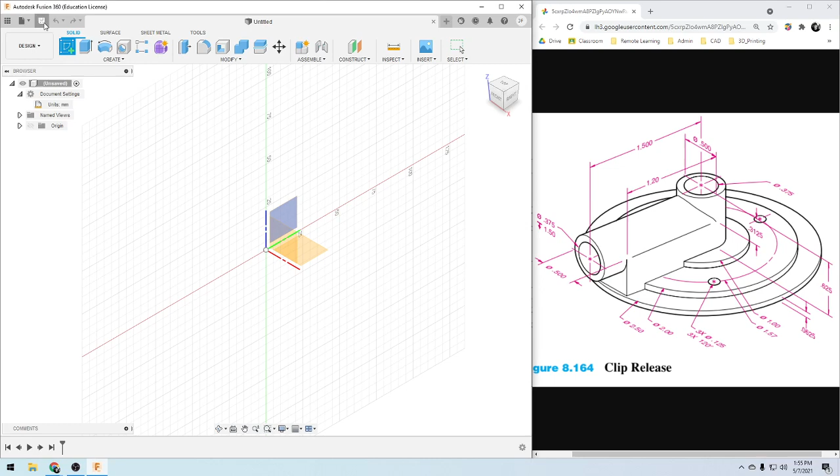First things first, I gotta make sure I'm in the right dimensions, which I'm not, and I want to save, make sure this is saved. So clip release, and my units are going to be in inches, and now I can start.

So create a sketch. I'm going to work from the top plane, and I'm just going to start creating some circles here, some discs. The first one is 2.5 inches. Dimension that. 2.5.

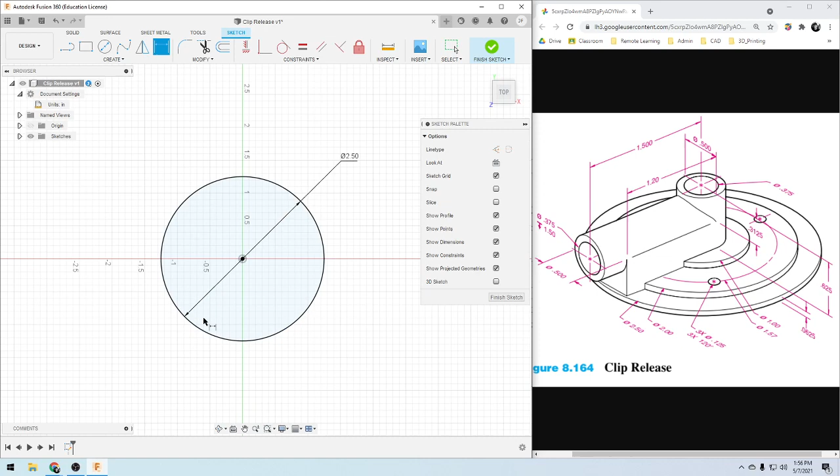And then extrude it, E for extrude. The depth, or the thickness, is 0.0625. So it's a relatively small part here.

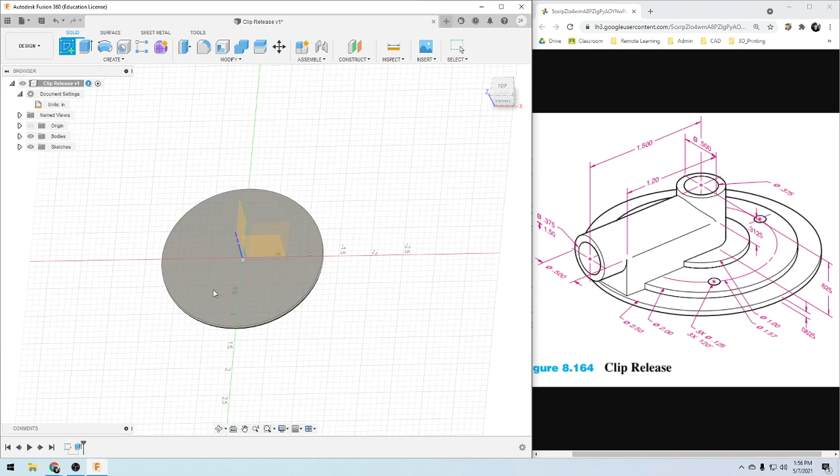From here, I'm going to extrude another disc, and I'm going to choose the top there, circle. This one is 2 inches, and I can extrude it.

I am going to extrude this. Since we're not given more information on the depth of this, we're just going to assume it is 0.0625, because normally if it wasn't, they would let us know. They would give these individually, because there's symmetry going on here, and to break that without telling us would just be poor on their part. So we're going to make that assumption, 0.0625.

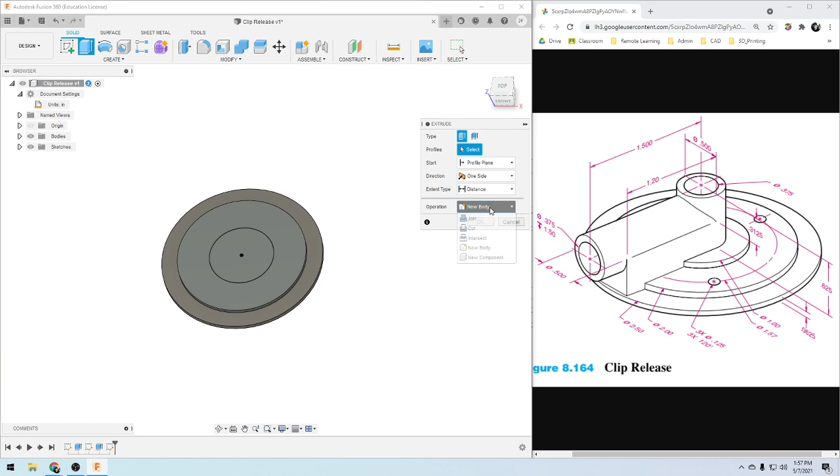Click in here. I mean, we could also do the math, right? We could figure out the space in between, but that's not necessary. Another circle, and this is going to be 1 inch. E for extrude, join, I'm not creating a new body here. And again, 0.0625.

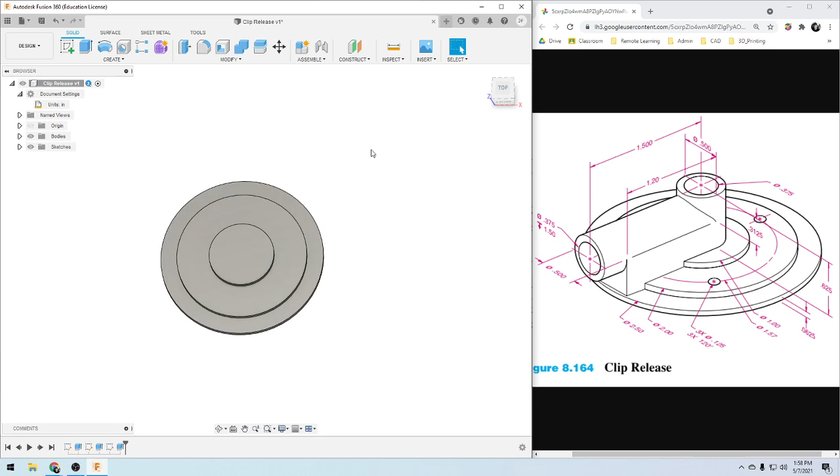So we look good, we look good. Alright, so now I'm going to get these holes out of the way. That's going to be a pattern too that I'm going to use.

I'm on the second step there, so create a sketch, click the second step, and then I'm going to create a circle, but I want a construction circle. So I'm going to click there, click here, dimension that out, and that is 1.57.

Now I'm going to create a circle that is here. Oh, I do not want a construction circle. This one is going to be my hole.

And I am making the assumption here that this is directly in line with the quadrant of the middle hole, the top quadrant. So I'm making the assumption that it's directly above here, because again, I don't have any other assumptions I can make.

And this dimension is going to be 0.125. And if it's not black, sometimes we can create a construction line that will kind of snap things into place and define it. So now it knows where it's lined up with this vertical line.

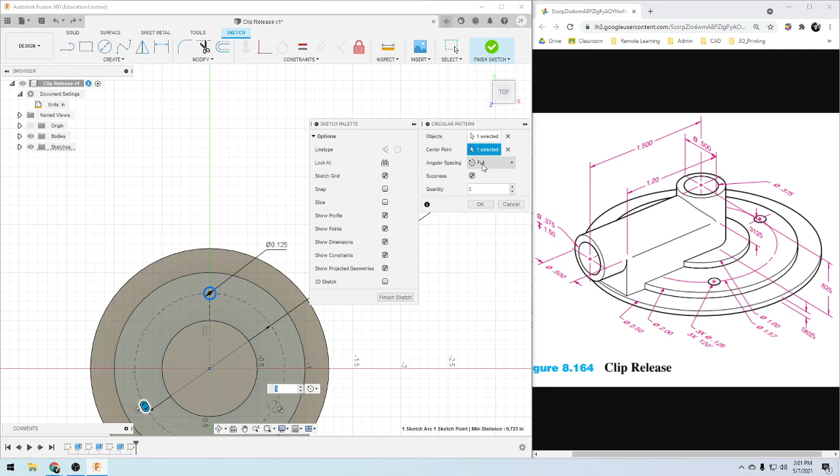3, and angular spacing, so full. Full is the same thing as equal. So I could actually put in 120, right? But that's going to be the same thing, because 120 times 3 is 360. So that is indeed full.

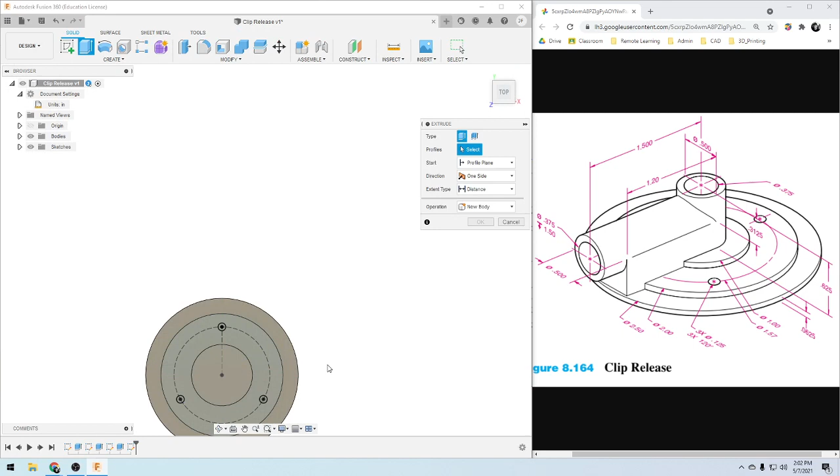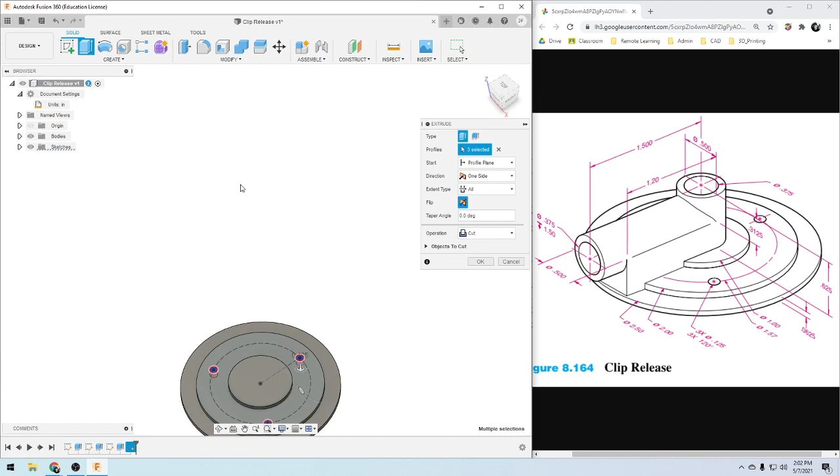Now I am going to extrude these holes. I'll click on these holes. And it's actually going to be cut, and distance is going to be all, and then I'm going to flip it. And OK.

F6 to zoom in like that. Go on to the top. Alright.

Cool, so now we have this middle piece we have to make. How I'm going to do it is I'm going to select this face down here and extrude it to the halfway point of this circle, to this height here. So we're going to have to do a little bit of math, adding together these two steps: 0.0625, 0.0625, and then add 0.3125 to get to this point here.

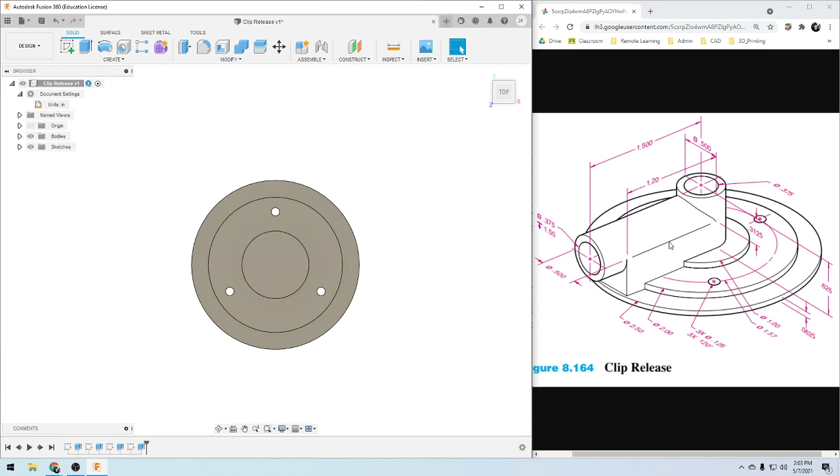Start a sketch, click here, and let's start with a line. Let's start like this, make a line out like that, come down, another line. Actually, we want it here, like that. So now this needs to be the midpoint, so let's make that the midpoint. Click this line, click that point, and now that is indeed the midpoint.

So now we have to dimension this out, and the length is going to be 1.2, and this width is going to be 0.5.

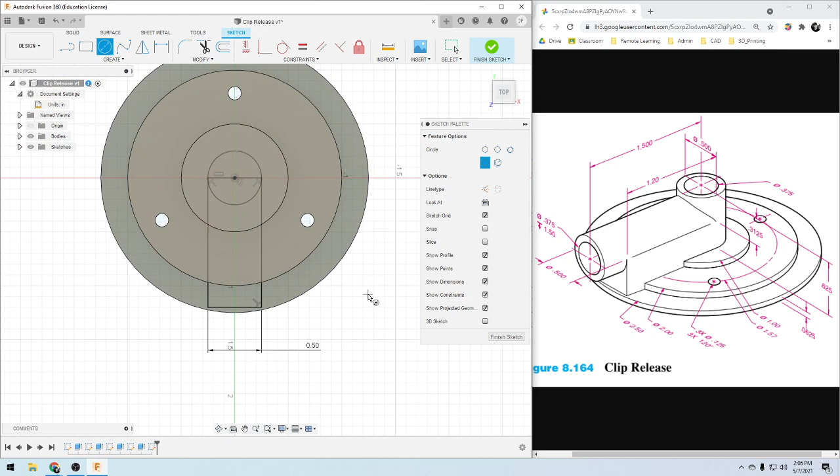Now we're going to extrude it. Extrude. Actually, before I do that, I'm going to complete the circle. Rather than have it like so, I'm going to complete the circle and make this have a round here on the end. So I'll double click back into Sketch. Cancel out of Extrude, automatically brings me back into Sketch. So circle, then go from here, and then go out. Now I'm going to get rid of this circle, or I can just leave it, doesn't matter, I'll just leave it. So E for extrude, and I'm going to click on this.

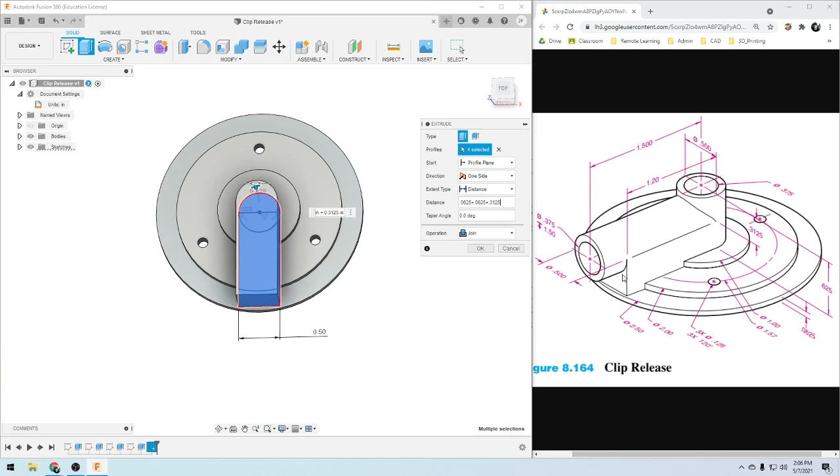This, and this. Okay, so I am going to not cut, but join. And this is where I need to do my math, right? I'm starting here, so I need to add 0.0625, 0.0625, and then I need to add 0.3125. So 0.0625 plus 0.0625 plus 0.3125. Enter. And it looks good.

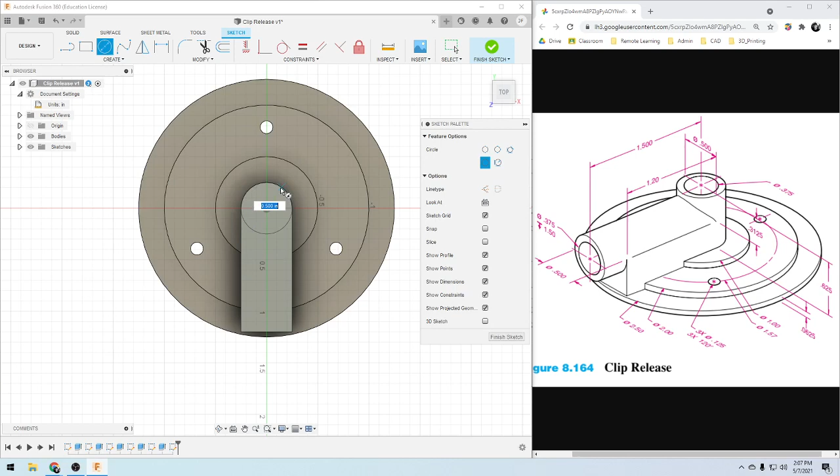So now, on top of this piece, I need to extrude the circle, this pipe out a little bit more. Sketch, circle, E for extrude. This is going to be 0.3125. Looks good.

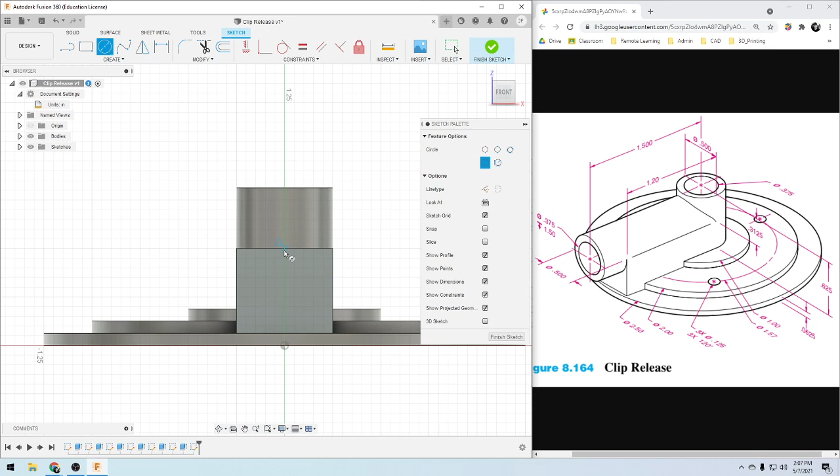Alright, we're getting there. Create another sketch out in front here. I'm not worrying about the holes yet. Circle, midpoint, that point. Notice how it's fully defined because I only referenced the part, which is also fully defined. Now I'm going to extrude, select the top part there. I mean, I could select the whole thing, but it might give me a warning or something, so leave it at that.

And the distance, so I know the distance is going to be negative. It's going to be going in this direction. So negative 1.2.

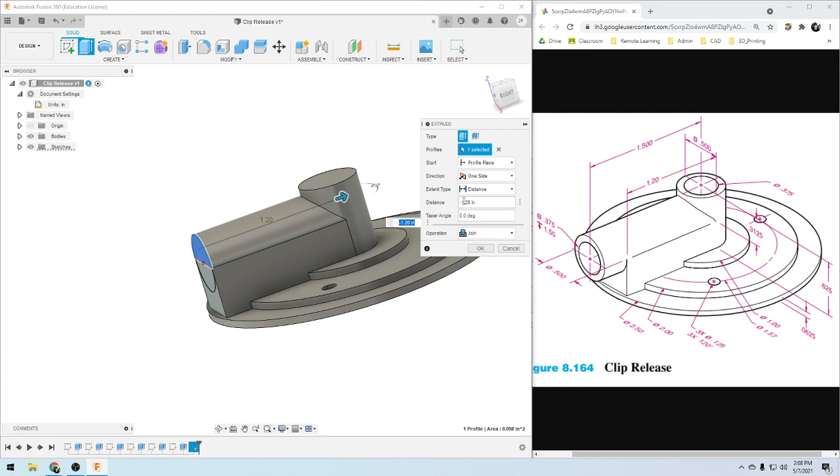Uh-oh. Oh, it needs to be extruded in two directions, right? We have a strange-looking shape here, so we need to choose another distance. So one side, we're actually going to do this two-sided. Then I'm going to click on both of these, and this is going to be in the positive 0.3 direction. Join distance. Oh, what's going on here?

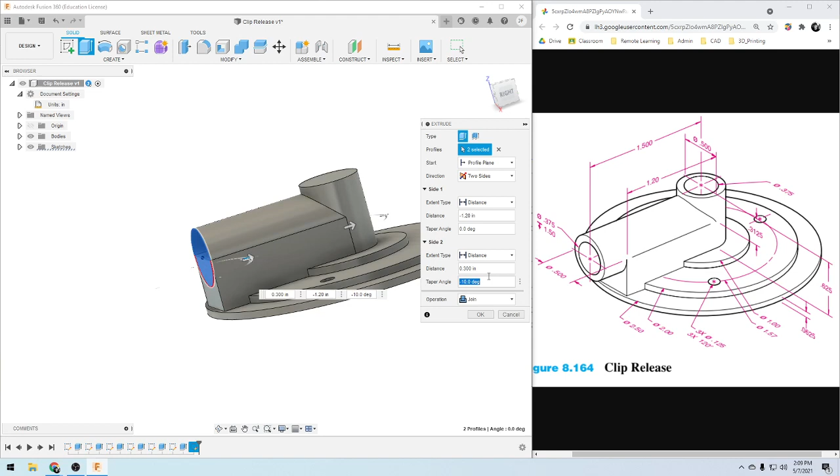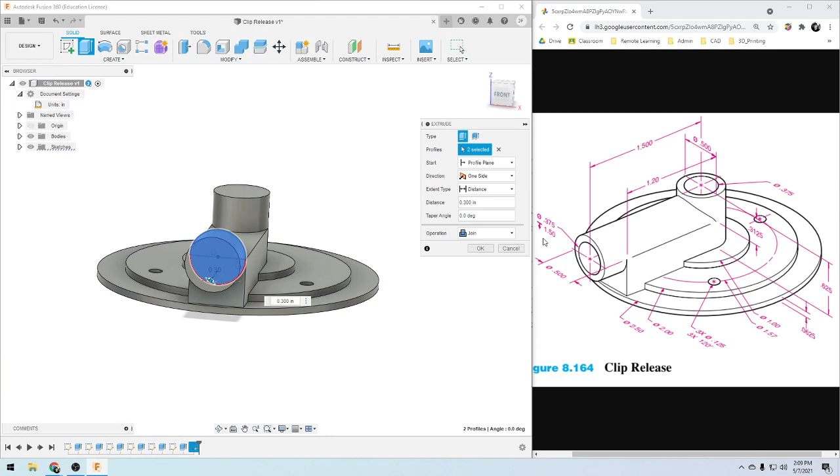You know, let me just start this over again. I think something weird was happening. Alright, extrude, I'm going to select both sides. This is going to be my 0.3, and then two sides. Then this is going to be the negative 1.2. And it's not going to be cutting, it's going to be joining. Huh. Oh. Never mind.

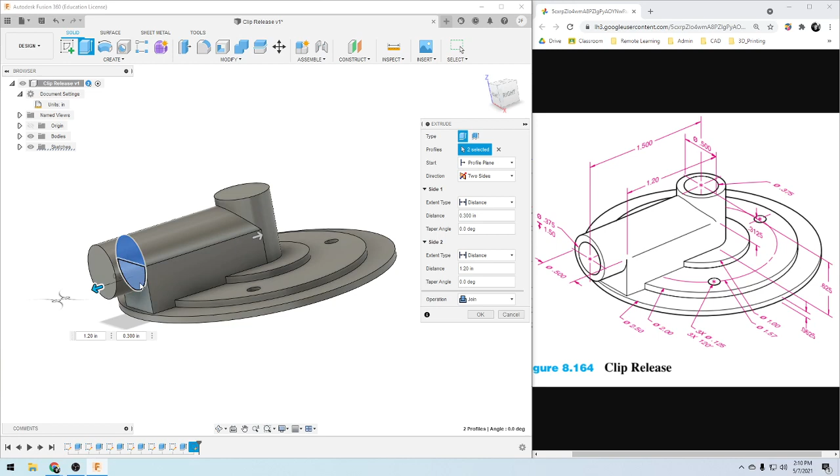That's funky. Okay, so what was happening is I was putting negative, assuming this was positive, but it's positive if it's pointing in that direction. So if the line is pointing, it's negative wherever — it's not the orientation of the part, it's actually where this extrusion line is pointing that makes it negative or positive. Okay, so now we're good.

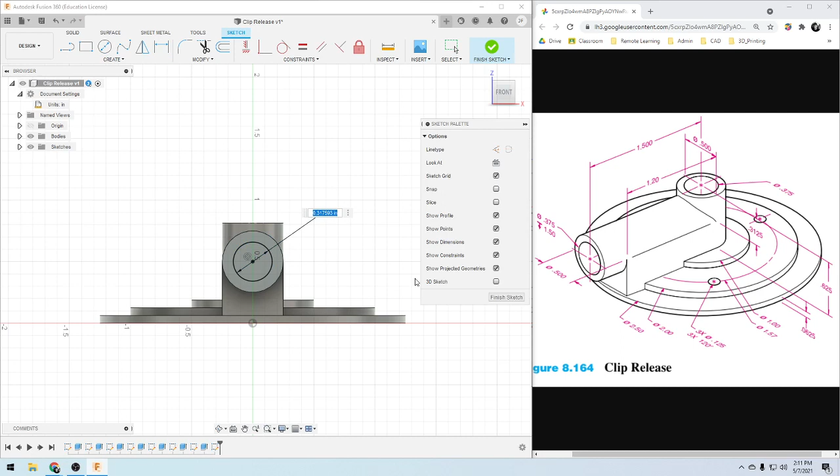Now we only got two more things to do: we need a hole from the top and then a hole from the front. So we'll start from the front of our train-looking shape here. In the center, dimension that out, and that is 0.375, and extrude it, select our, this is going to be a cut. So now I need to put it negative, because the arrow is pointing toward us. So negative 1.5, excuse me, 1.5.

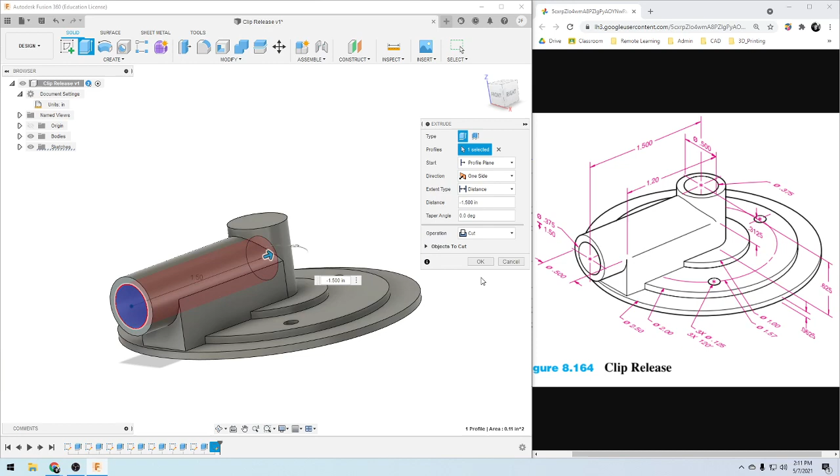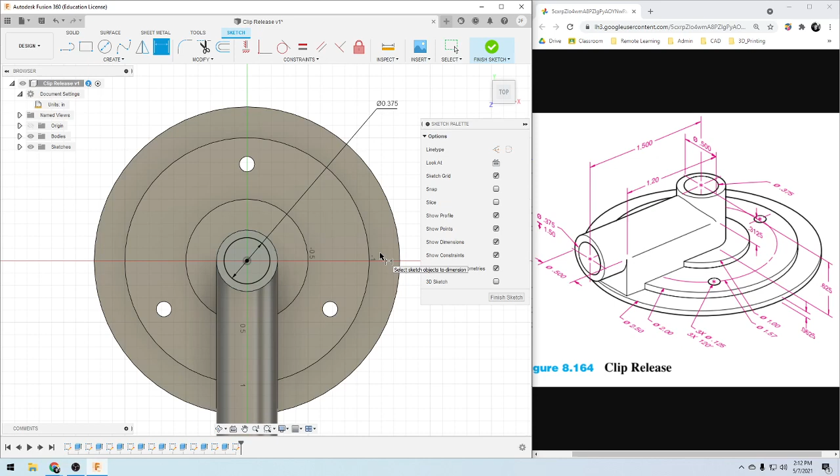Alright, okay, I got that hole, so now we're going to cut clean through here. Sketch, top, circle, dimension that out, and that's going to be 0.375, and we're going to extrude it, E, and again we're going to be going in the negative direction, cut, but we're just going to put this through all, and I'm going to flip that so that it actually cuts through. Okay, and there you have it. You have your clip release.

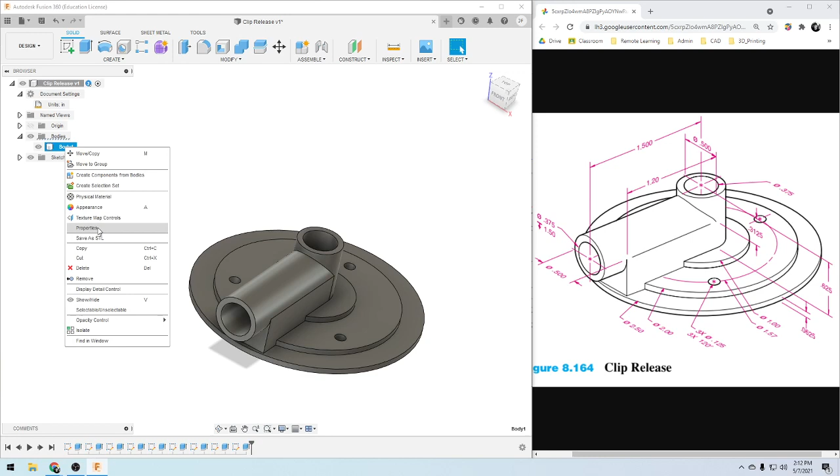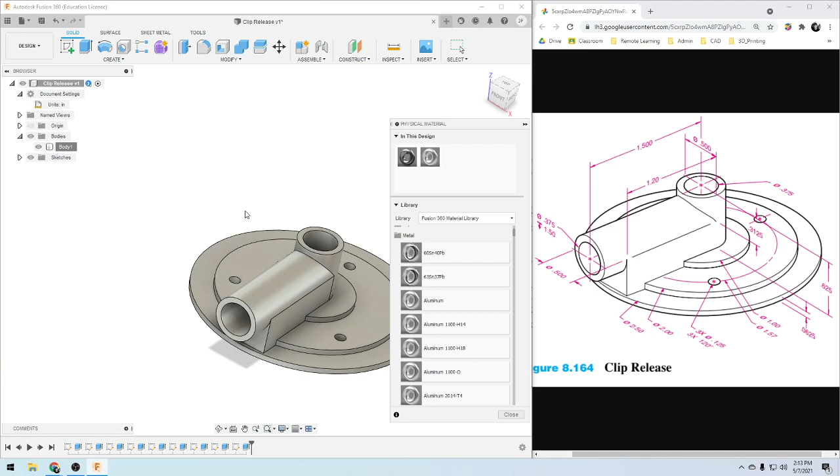Okay, so from here I'm going to assign a material, and I will assign aluminum. We normally choose aluminum or stainless steel because that's what's commonly used. Alright, aluminum, and now to get the mass properties, I'm just going to click again on this body and properties, and the mass is 1.209 ounce. So that's what you should get if you assign the material as aluminum and you followed along with what I've done here.